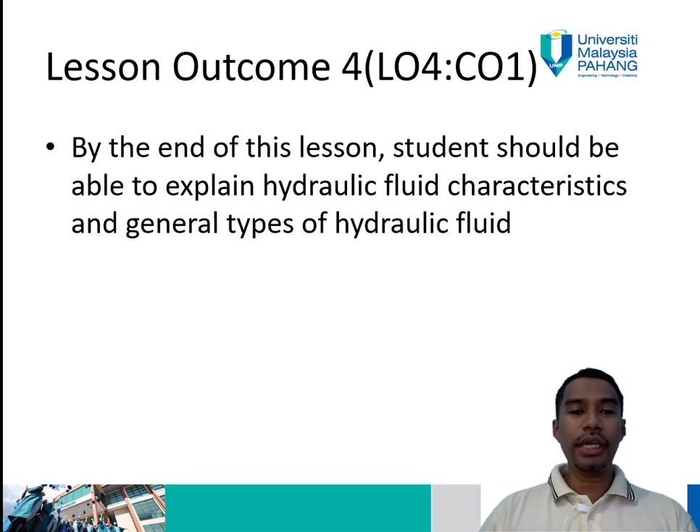We begin with some history of hydraulic fluid. Water was the first fluid used for transmission of fluid power. Before the scientists find out the oil and synthetic oil, water is the one that being used for the power transmission.

The main advantage of water as hydraulic fluid is the availability, low cost, and fire resistance. So now we know that the water is freely available, and it's also have the fire resistant features.

But in terms of the disadvantages of water, it corrodes. We know that if the material, especially the metal, is exposed to the water and also air, so it may corrode.

The water also will evaporate in high temperature, so means that it's not suitable to be used in high temperature condition. It also supports growth of bacteria, has contamination, then poor lubricity and low viscosity. So that's among the disadvantages of water.

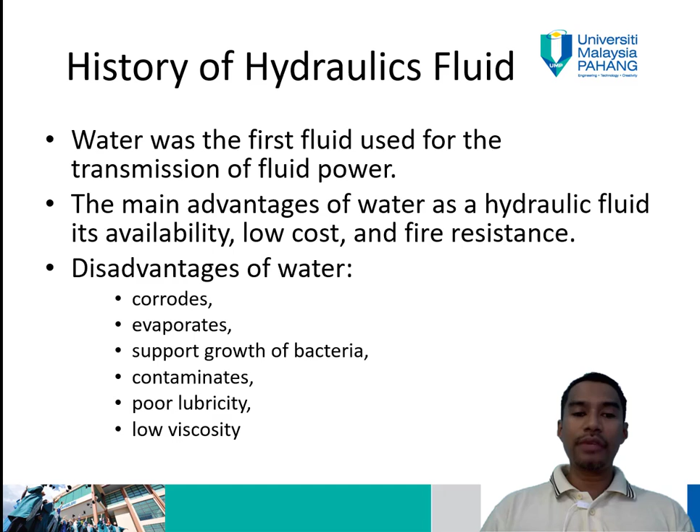So some history of hydraulic fluid. Mineral oil are readily available at beginning of 20th century, but were not practically used in hydraulic system. The mineral oil was found in early of 19th century.

Then the first additive were used to improve the physical and chemical properties of hydraulic mineral oil. The additive was then identified to improve the physical and chemical properties of mineral oil.

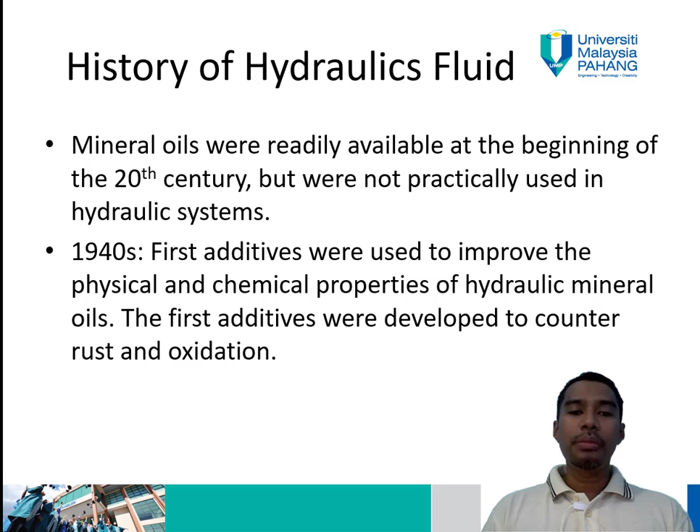Then the first additive were developed to counter rust and oxidation. As we know previously, the only available fluid is water, so the main problem with the water is the rust, corrosion and oxidation. The scientists try to improve the properties of the fluid by adding the additive into the water.

Some history about the hydraulic fluid: mineral oil are highly flammable and fire risk increases when operating at high temperature. So we know that the mineral oil, basically from the petroleum base, are highly flammable, and has a fire risk increased when operating at high temperature.

So means that this kind of mineral oil is not suitable for high temperature condition. For example, if we want to use in the process like injection molding, or at the furnace and so on, so this kind of fluid is not suitable.

This has led to the development of fire resistant fluid that are mainly water-based with limitation on operating condition. So the scientists were developing the water-based fluid, but it has the limitation in the operating condition. So in order to avoid the fire hazard, they use the water-based, but when they use water-based, it has some limitation.

The need for extreme operating temperatures and pressure led to the development of synthetic fluid.

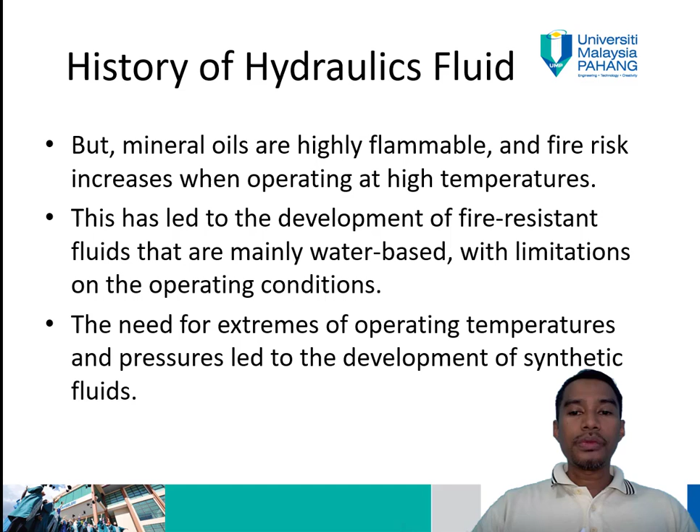Then the primary function of hydraulic fluid is for the power transmission, so to transfer the power, as a lubrication, to lubricate the movement of the component inside the hydraulic system, for the sealing, so means that the fluid itself become the sealing agent for the component.

Thin hydraulic film act as sealing that reduce leakage. Then cooling, capable to absorb heat generated by a moving part. Then cushioning of oscillation caused by pressure jerk.

The hydraulic fluid here is also work as the pressure, the jerking absorption. Currently we know that we have the suspension system that use the hydraulic system, so the hydraulic fluid inside the suspension works to absorb the jerk.

Then it also being the corrosion protection. The hydraulic fluid should be able to protect the component from the corrosion.

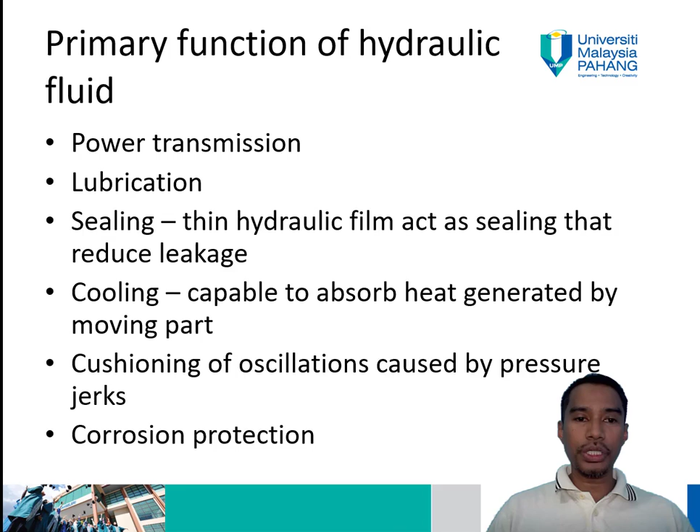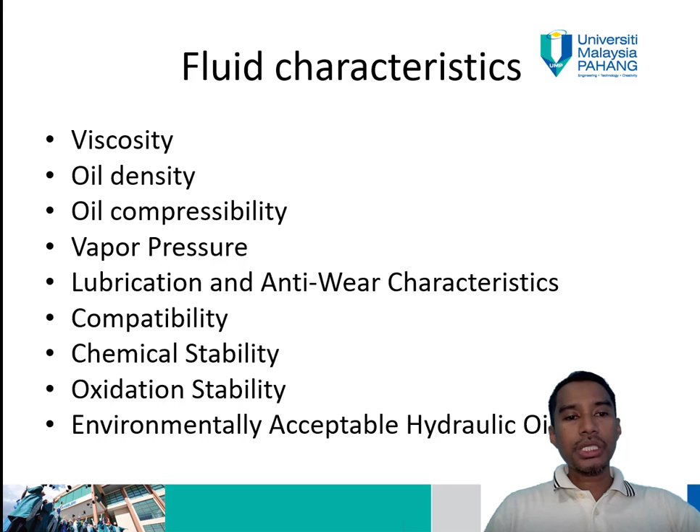These are some of the fluid characteristics that we need to consider: viscosity, oil density, oil compressibility, vapor pressure, lubrication, anti-wear characteristic, compatibility, chemical stability, oxidation, and environmentally acceptable hydraulic oil. So we try to discuss one by one the characteristics here.

We begin with viscosity: describe the resistance to the laminar movement of two neighboring fluid layers against each other. I believe that for the viscosity, basically you already learned in fluid mechanics. In simple word, viscosity is a resistance to flow. It results from cohesion and interaction between molecules.

So means that normally the higher viscosity of the fluid is, it become more resistance and make the fluid difficult to move, right?

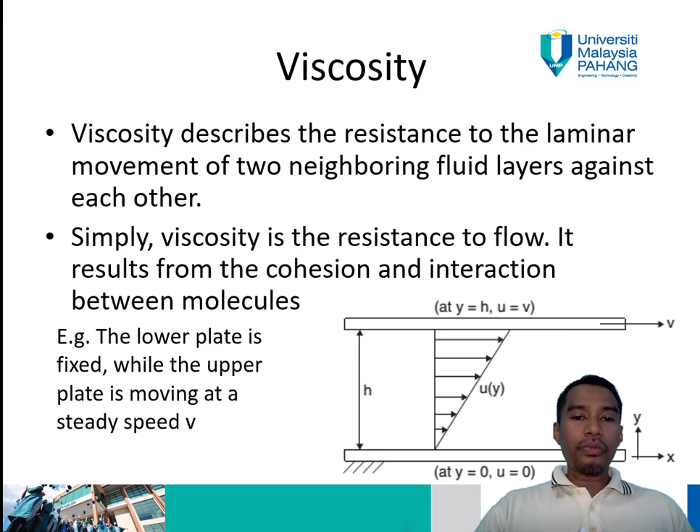Important to keep the oil viscosity within a certain range. Basically the viscosity is one of the important parameters in hydraulic fluid that determine the characteristic of the fluid itself. The viscosity index of oil is a number used in industry to indicate effect of temperature variation on the viscosity of the oil.

So there is one indicator that normally being used in industry, which is VI or viscosity index. A low VI signify relatively large changes of viscosity with temperature variation, right?

So when the fluid has low VI, it means that when the temperature is changed, the viscosity will also have a large change with the temperature changes. Then a high VI means relatively little change in viscosity over a wide temperature range. The fluid with high VI has little changes in viscosity even though the temperature change is wide.

So which one is the best? The best oil is the one that maintains constant viscosity throughout the temperature changes. Although it operates at room temperature, compared with maybe 45 or 50 degrees Celsius, the viscosity can be maintained - that is the best one. But of course, the higher viscosity index fluid is much more expensive compared with low VI fluid.

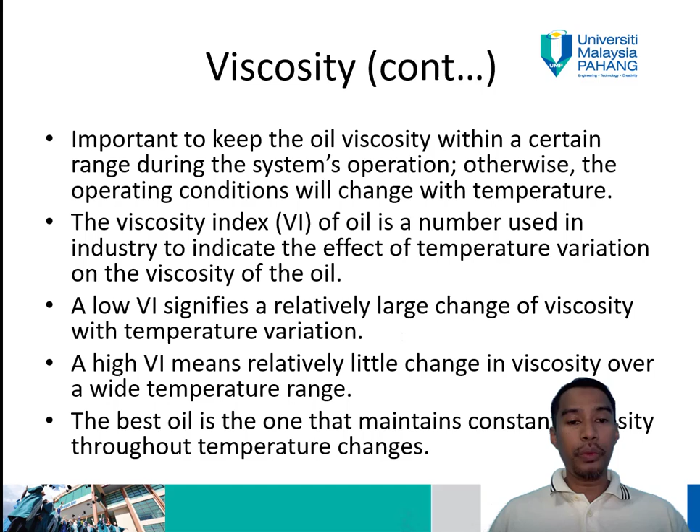So this is the effect of viscosity on hydraulic system operation. The oil viscosity influences the function of hydraulic power system as it introduces resistance to fluid flow and to the motion of moving bodies in the fluid. So for high viscosity fluid, it has a larger resistance compared with low viscosity fluid.

For example, if we compare oil or water with grease, the water has a lower viscosity compared to grease, and the water is easier to be transported compared with the grease, because the grease has higher resistance compared with the water. So the following effects are studied.

The effect on the hydraulic system - hydraulic losses in transmission line. When we use high viscosity fluid, the losses in the transmission line are high compared with when we use low viscosity fluid. Then resistance to fluid flow in narrow conduits.

Another effect: if we use high viscosity fluid in a tube, it's much more difficult to move from point A to point B, because of high resistance compared with the fluid with low viscosity. Then the third effect is viscous friction forces and damping - it will affect the friction and also the damping on the system.

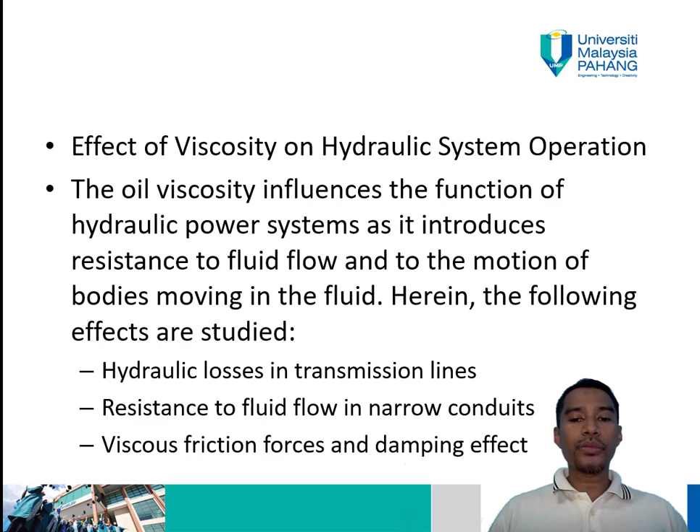Next is oil density. Density is rho equal to m divided by V, mass per volume. The hydraulic oils are of low compressibility and volumetric thermal expansion - so hydraulic oil is the one with low compressibility and volumetric expansion.

So it means that in this study we assume that the oil density is constant under ordinary operating conditions. The density of mineral oil ranges from 850 to 900 kg per meter cubic. As you know, water has a higher density compared with oil, which is 1000 kg per meter cubic. The oil density affects both the transient and steady state operation of the hydraulic system.

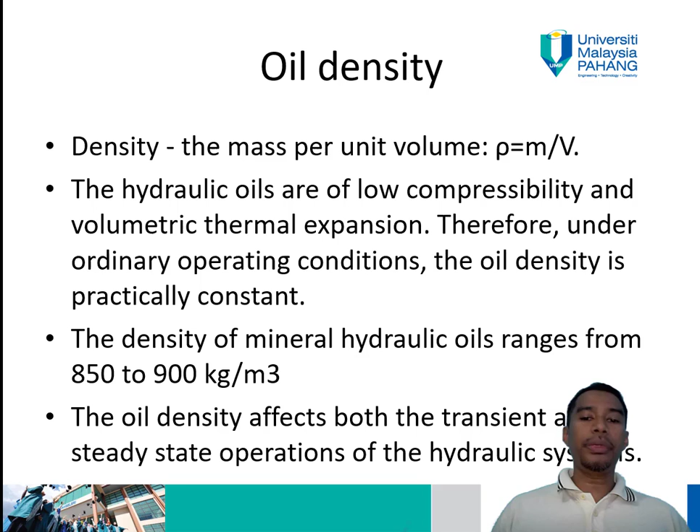So this is one of the effects of oil density in the hydraulic system - it will affect the transient and also steady state operation. It also affects the local losses, resulting from rapid variation in the magnitude or direction of the velocity vector, for example in throttling elements, elbows, and T connection areas.

Throttling element means we have one valve that controls the flow. So when we have the valve, it will have resistance, so there will be losses. The fluid with higher density will have higher losses - directly proportional to the fluid density are the local losses. Then the second one is hydraulic inertia.

This occurs during the early running stage, affecting the transient response of the hydraulic transmission line, but has no significant effect on steady state behavior. This occurs during the early stage - for example, if we use a simple aquarium pump, we put the pump inside our aquarium and turn it on. For the first few seconds, if we observe the flow, it is not stable.

Because there is a density effect on the operation, but after a while, maybe 5 to 10 seconds, we can see laminar flow come out from the channel. This means that during the early state, the overall system is not stable yet, because most of the piping or tubing in the hydraulic system is not filled with the fluid yet. Once the fluid is already running and fills every volume in the channel, normally it will have no effect on the hydraulic system.

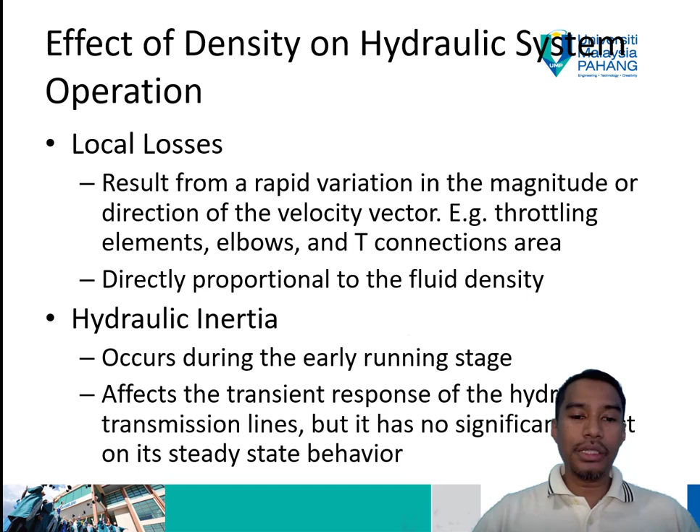Next is about oil compressibility. It's defined as the ability of liquid to change its volume when its pressure varies. Liquid has very low compressibility compared with gas. Therefore, liquid is usually assumed incompressible.

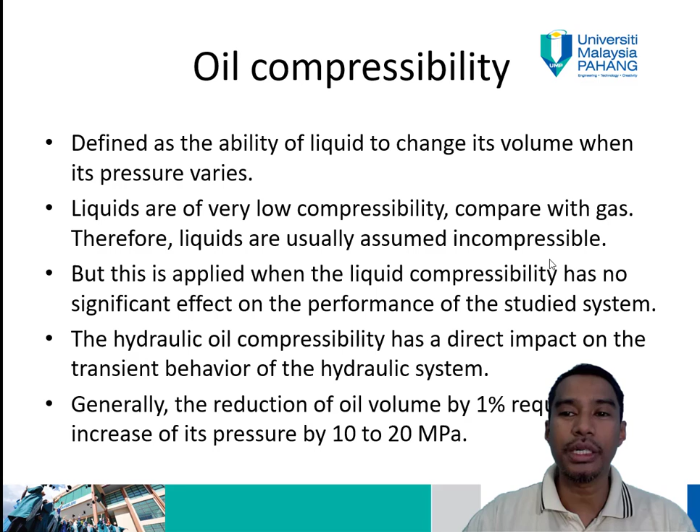So we already learned this - maybe from secondary school we know that liquid is incompressible compared with gas, and gas can be compressed. But in reality, generally the reduction of oil volume by 1% requires an increase of its pressure - if there is a pressure increment, the volume will also be reduced. In reality, for liquid, when we increase the pressure by 10 to 20 megapascal, 1% of the volume will be reduced. That is the real condition.

Then lubrication and anti-wear characteristic. The fluid must be capable of covering the contact surface of all moving parts with a thin and continuous lubricating film. The lubricating film may be destroyed as a result of high loading forces, insufficient oil delivery, and low viscosity.

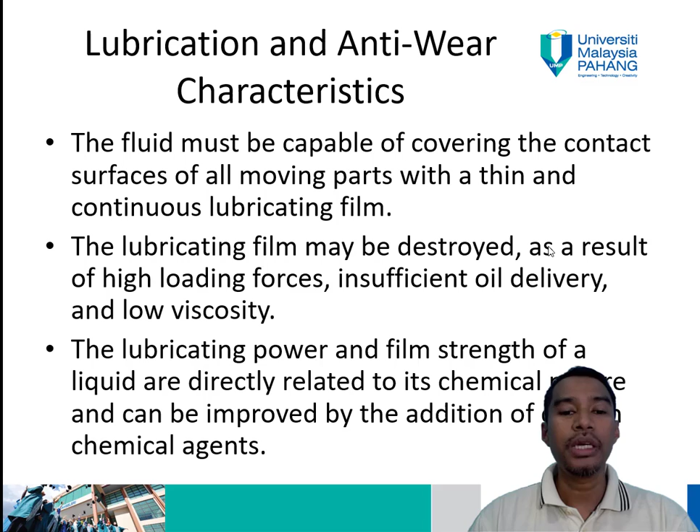So one of the functions of hydraulic fluid is for lubrication, but this film might be destroyed if we use the system with excessive high pressure. Lubricating power and film strength of a liquid are directly related to its chemical nature and can be improved by addition of certain chemical agents.

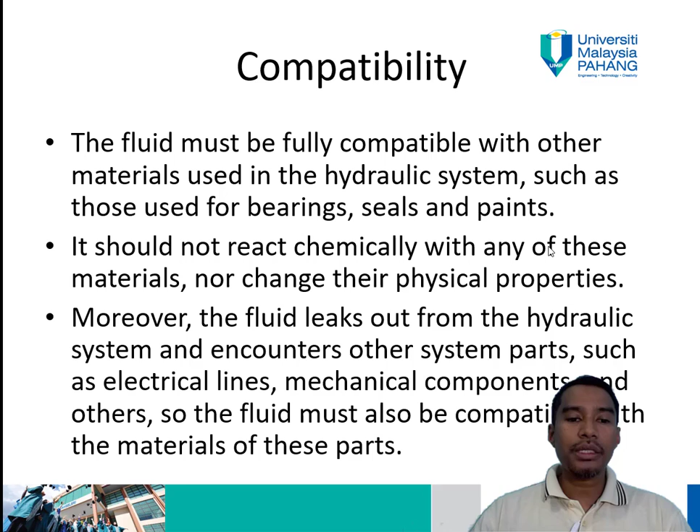Then in terms of compatibility, the fluid must be fully compatible with other materials. It should not react chemically with any of these materials or change their physical properties. This is one of the conditions that we want to avoid. Moreover, the fluid may leak out from the hydraulic system and encounter other system parts. When there is a leakage, if the fluid is not compatible with the component, it might attack the other component, such as electrical lines, mechanical components and others.

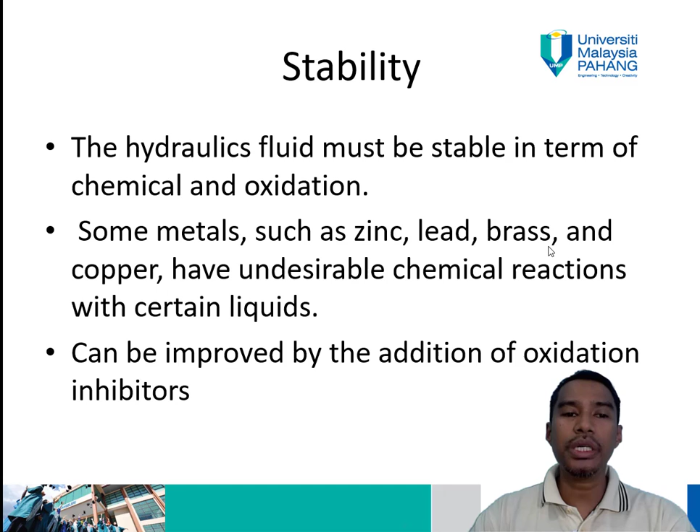Then in terms of stability, the hydraulic fluid must be stable in terms of chemical and oxidation. Some metals such as zinc, lead, brass, and copper have undesirable chemical reactions with certain liquids. The fluid stability is important to ensure that there is no chemical reaction occurring in our system.

Then environmentally acceptable hydraulic fluid. An oil leak may result in considerable pollution of the surrounding and groundwater. Mineral oils are composed of relatively stable hydrocarbon compounds and are only very slowly broken down by microorganisms. So we know that the oil we use must be compatible with the environment, and when we want to dispose of the oil, we must follow the regulation set by the Department of Environment. So you must check how to dispose of the fluid.

Then the most common problem occurs when the system is leaking. The company is not purposely wanting to dispose of or let the fluid go to the environment, but oil leaking occurs. So that's one of the conditions that we want to avoid.

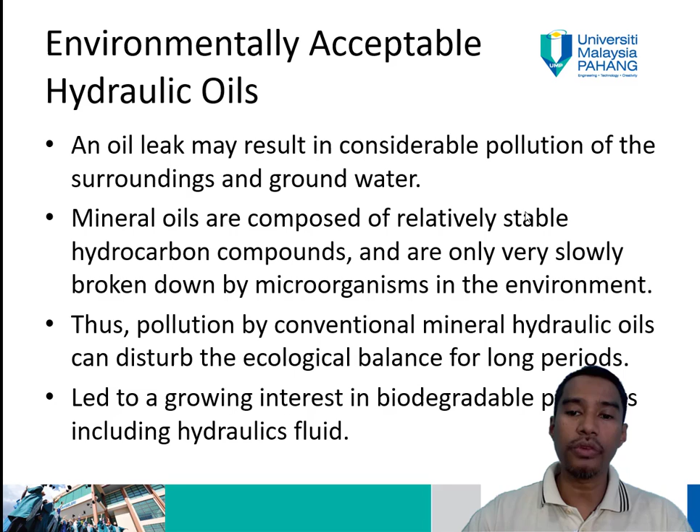Next we move to the classification of hydraulic fluid. We can classify hydraulic fluid into a few classifications. The first one is mineral oil. This is the most widely used hydraulic fluid, relatively inexpensive, widely available, and can be offered in suitable viscosity grade.

It has good lubricity, is non-corrosive, and compatible with most sealing material, with the exception of butyl rubber. It is chemically stable for reasonable operating temperatures, but at high temperature they suffer chemical breakdown. So for mineral oil, this kind of fluid can be used in most places, but we need to be aware when we are using butyl rubber material inside our hydraulic system, because it can react with this material.

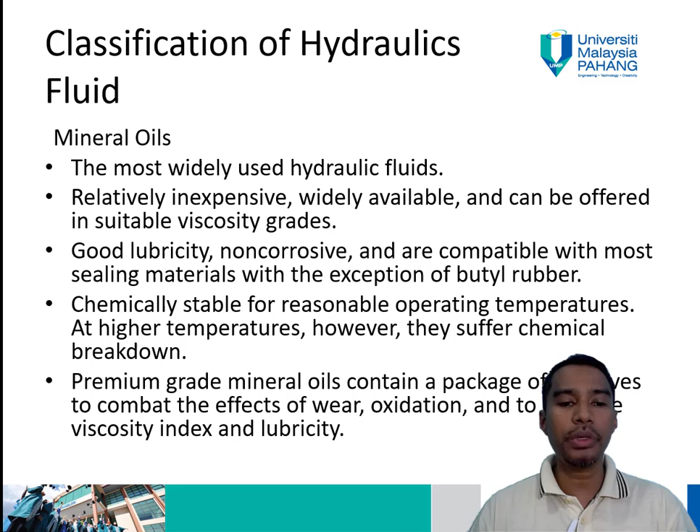Premium grade mineral oil contains a package of additives to combat the effect of wear and oxidation, and improve viscosity index and lubricity. So some disadvantages of mineral oil cannot be remedied by incorporating additives.

Mineral oil also has high flammability, and increases in viscosity at high pressure. Previously for viscosity index, we were talking about viscosity changes with temperature, but in this case viscosity changes with pressure. Fire risk excludes the use of mineral oil in hazardous areas such as injection and plastic molding.

Coal mines and near furnaces. So this means that mineral oil is not suitable for high temperature environments. The viscosity-pressure characteristic limits their use to pressure below 1000 bar, so we need to limit the usage of mineral oil below 1000 bar. 1000 bar is already high pressure.

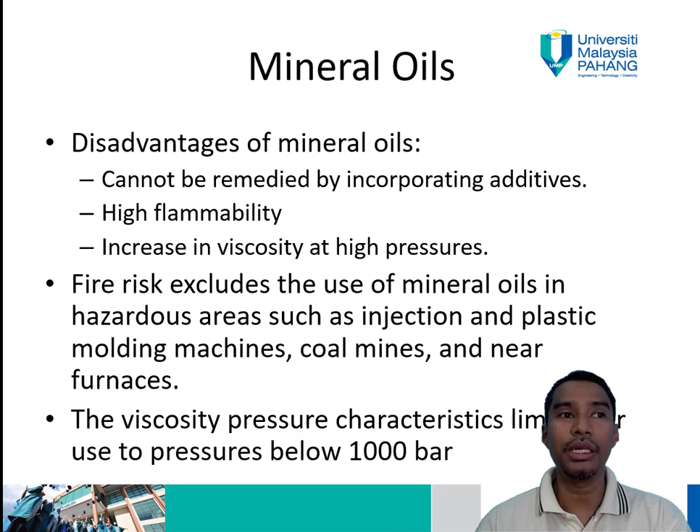Then the second type is oil in water emulsion. This hydraulic fluid consists of tiny droplets of oil dispersed in a continuous water phase. The dilution is normally between 2% and 5% oil in water, and the characteristics of the fluid are more similar to water than oil. It is extremely fire resistant, highly incompressible, and has good cooling properties, but it has poor lubricity and low viscosity.

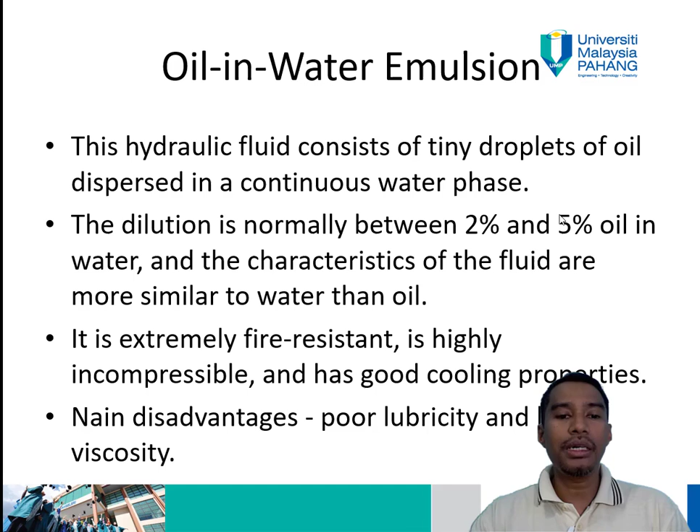So this is the oil in water emulsion. This means the base material here is water, and as we know water is fire resistant, but it has a problem with evaporation and so on. So a small percentage of oil is inserted into the water-based fluid, just 2 to 5% only, so they can improve a few characteristics.

Then the next one is water in oil emulsion, the most popular fire resistant fluid. They have a continuous oil phase in which tiny droplets of water are dispersed.

Their lubrication properties are very much reduced. For optimum life, the operating temperature should not exceed 25 degrees C, but intermittent operation up to 50 degrees C is permissible. So for water in oil, the base material or base fluid is the oil.

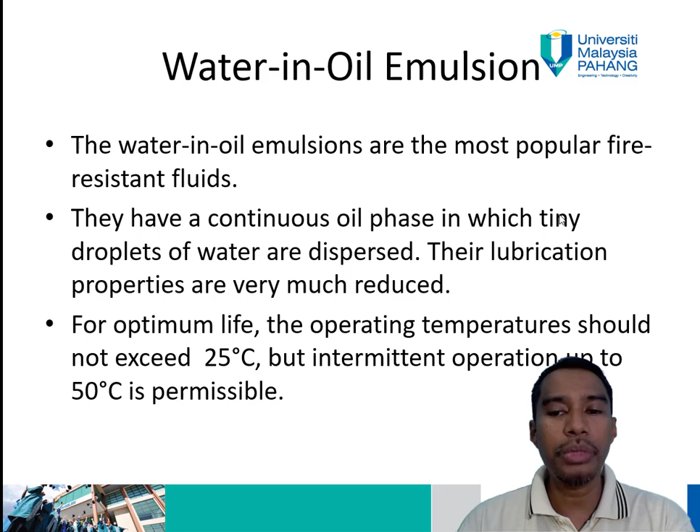A tiny droplet of water is inserted into this oil. It's not the normal water we use, but water that has been chemically processed. The operating temperature there is relatively low.

At high temperature, the water content is affected owing to evaporation, which decreases the emulsion fire resistant properties. So for this type, at high temperature the water content will be evaporated, and it will affect the performance of the system.

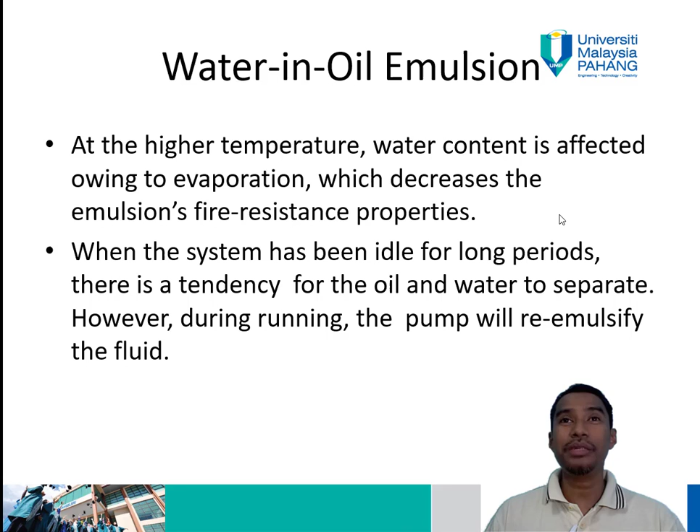When the system has been idle for a long period, there is a tendency for oil and water to separate. However, during running of the pump, we re-emulsify the fluid. If we leave the system or fluid for a long time, the water and oil will be separated, so it's not being emulsified. So when we want to start the system, it's good practice to mix the fluid back.

Next is water glycol fluid. It was developed primarily for use in aircraft because of low flammability characteristics. Its application is limited since it cannot be used at high temperature because of its water content.

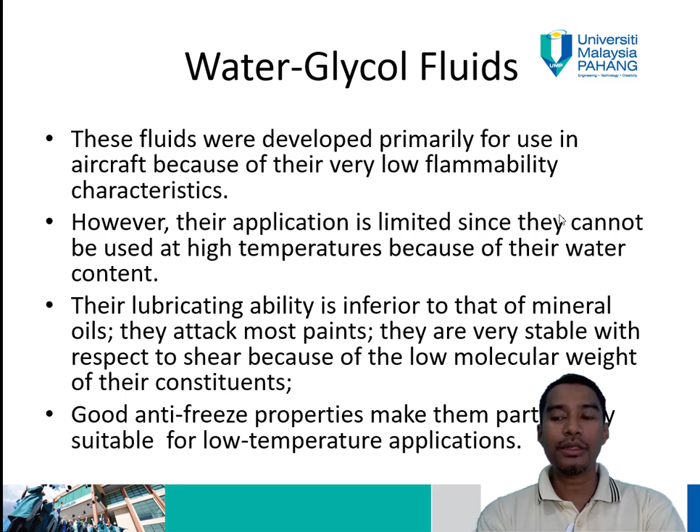Lubricating ability is inferior to mineral oil. They attack most paints, and they are very stable with respect to shear because of the low molecular weight of their constituents. Good antifreeze properties make them particularly suitable for low temperature application. So remember, water glycol is purposely used in aircraft and suitable for low temperature application.

Next one is synthetic oil. The example here is phosphate ester. It has good fire resistant properties, used in industries such as molding and die casting where unusually great fire risks occur.

This is one of the options mainly used in industry with high temperature. Their lubricity ability is similar to that of mineral oil. If you remember, mineral oil has high flammable risk, but synthetic oil still has good lubricity ability, and at the same time it also has good fire resistant properties.

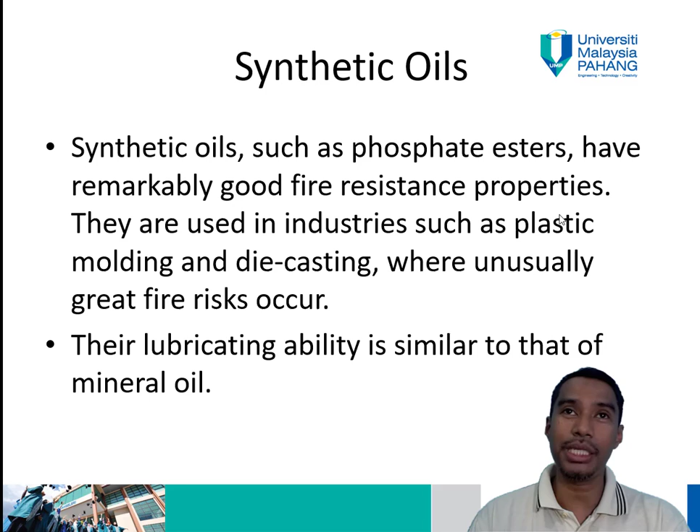Synthetic oil is superior when compared with mineral oil, as already explained. In terms of viscosity temperature properties, or VI index, it's also better than mineral oil.

But in terms of disadvantages, elastomer used in conjunction with phosphate ester must be chosen carefully. There is one chemical that needs to be inserted into the oil, and this elastomer needs to be used carefully. Certain metals like aluminium and most paints are susceptible to attack, so for this kind of oil, the application where we want to use it needs to be chosen carefully, because it will react with some materials.

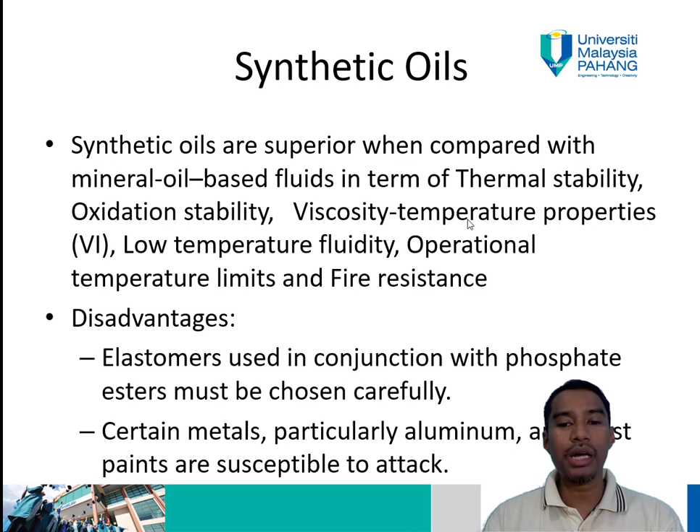The requirement imposed on the hydraulic fluid - we have already discussed a few types of hydraulic fluid, so now how to choose the best hydraulic fluid for our purpose.

The main requirement here is satisfactory flow properties throughout the entire range of operating temperature. We want to make sure that the flow properties are constant, although we are operating in different temperature ranges. High viscosity index ensures moderate viscosity variation in relation to temperature fluctuation, as discussed earlier.

Good lubricating properties are a prerequisite to reduce wear and increase service life of the system. Then low vapor pressure to avoid cavitation. Compatibility with system material, since the fluid should not react chemically with any of the used materials or deteriorate their physical properties.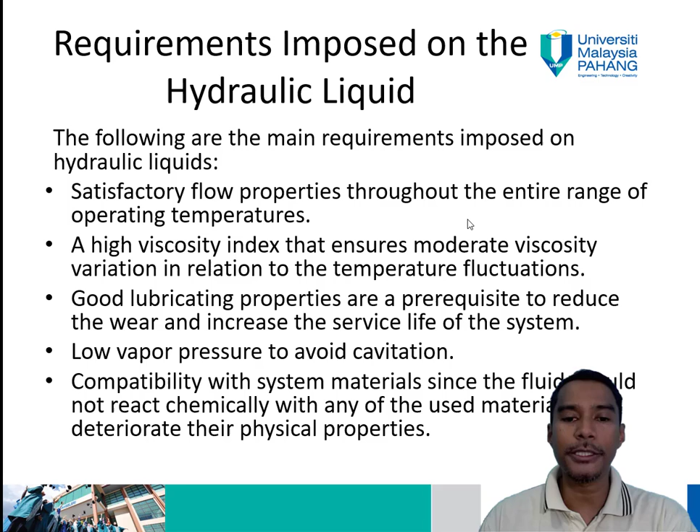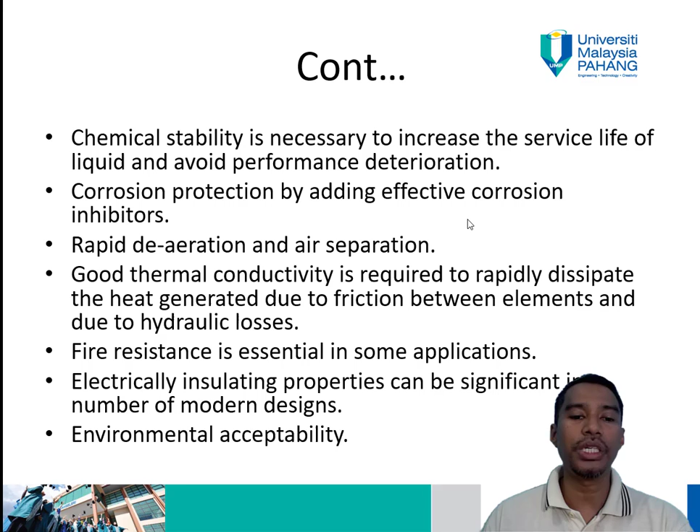Then environmental acceptability. So throughout this lesson, we already discussed a few fluid characteristics. When you want to choose a suitable fluid for your application, you must look at these characteristics and the type of hydraulic fluid, since there are a few types, and you need to carefully choose to suit your application.